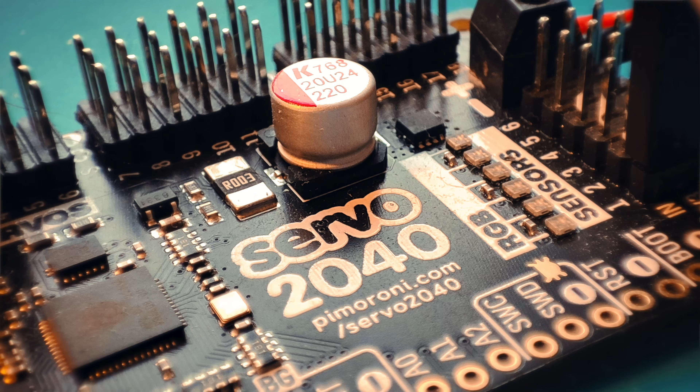Ever seen a spider robot in action? Well, in this series we are crafting our very own. Using materials that are easy to find, we are crafting a DIY spider robot. And I'm inviting you to join me on this adventure.

Now, a small confession. I'm learning as I go. Some challenges still puzzle me. And the beauty of this series is that we'll tackle them together, step by step. If you are new here, I suggest starting from the beginning to get a full experience. Throughout this series, I'll break down each part of the project, ensuring you can follow along with ease and maybe even kickstart your own robotic creation.

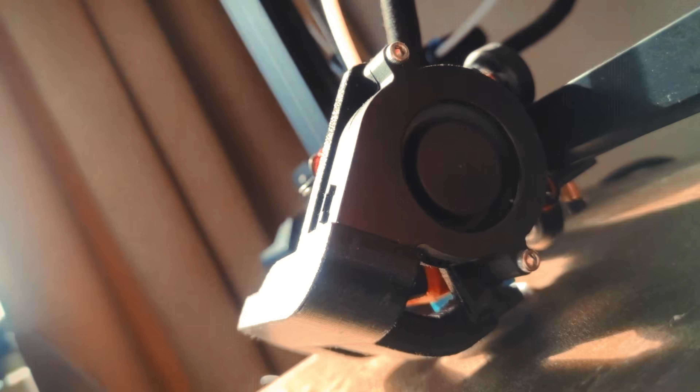I aim to keep these sessions short and to the point. However, if anything feels a bit rushed or unclear, don't worry, I've provided supplementary documentation and Jupyter notebooks to help reinforce and expand on what I cover. Remember, it's about the journey and understanding, not the pace.

Join me and let's embark on this exciting DIY voyage together. Today's enchanting adventure begins with exploring the secrets of inverse kinematics, where we'll learn how our spider robot will move its legs to traverse its surroundings gracefully.

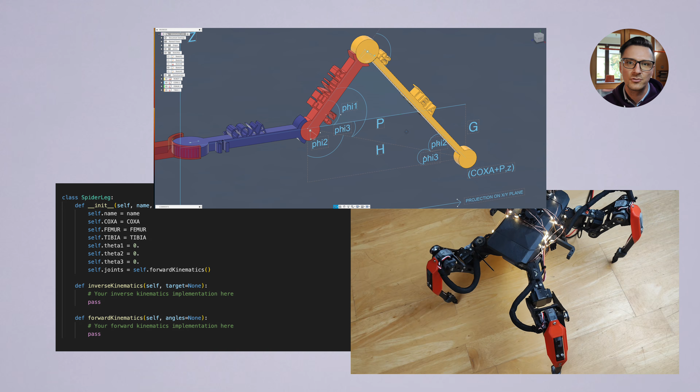In this tutorial, we'll learn how to write a SpiderLeg class to perform inverse kinematics calculations for a spider robot leg. Inverse kinematics is a method used in robotics to calculate the joint angles required to achieve a specific target position in the workspace. The opposite of inverse kinematics is forward kinematics, which calculates the position of the end effector, for example, the tip of a robot arm or leg, given the joint angles.

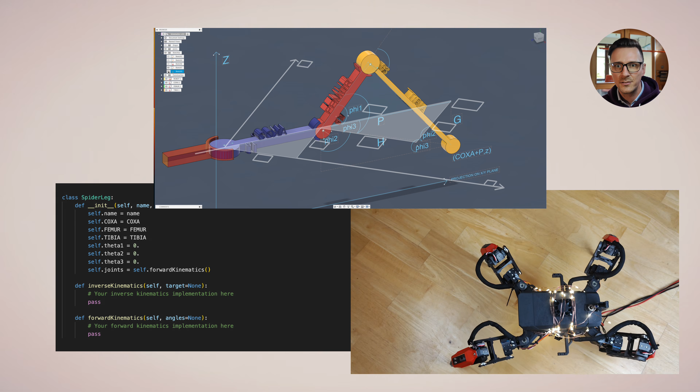In the case of our spider robot leg, we have three joints: the coxa (hip), femur (thigh), and tibia (shin). Each joint has an associated angle, which we'll call θ1, θ2, and θ3. Our goal is to determine the values of these angles that will place the leg's end effector, the foot, at a desired target position, x, y, z.

However, this is just scratching the surface of the spider leg's complex kinematics. For a more in-depth understanding and to see the intricate interplay of these angles and segments, I highly encourage you to visit my detailed tutorial on GitHub, where I break down the concepts further and provide a comprehensive guide to the sophisticated world of inverse kinematics.

In the example above, we have defined a simplified spider leg class that represents a single leg of a spider robot. The class includes the following elements. The init method initializes the class with a name, segment lengths, coxa, femur, and tibia, and initial joint angles, θ1, θ2, and θ3. The forward kinematics method is called to calculate the initial joint positions.

The inverse kinematics method is a placeholder for the actual implementation of inverse kinematics calculations. When given a target position, this method should compute the joint angles θ1, θ2, and θ3 required to reach the target. The forward kinematics method is a placeholder for the actual implementation of forward kinematics calculations. When given a set of joint angles, θ1, θ2, and θ3, this method should calculate the resulting end effector, foot, position in the 3D space.

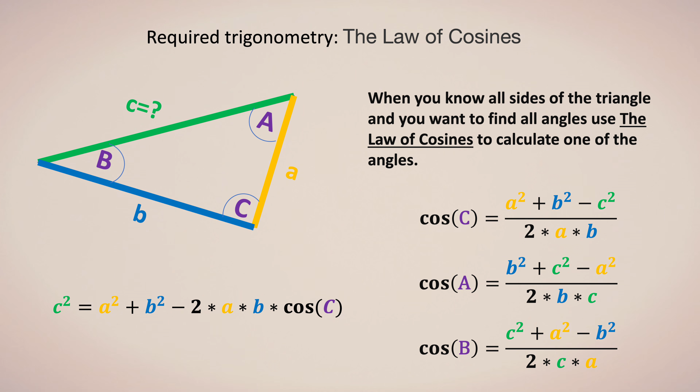Next, let's revisit fundamental trigonometric functions. Sine, cosine, and tangent are crucial for understanding the angles and sides of right-angled triangles. We also dissect the cosine rule, a pivotal principle that extends beyond right-angled triangles, helping us determine unknown sides and angles. These concepts are not just theoretical, they're the building blocks for calculating precise movements of our spider leg model.

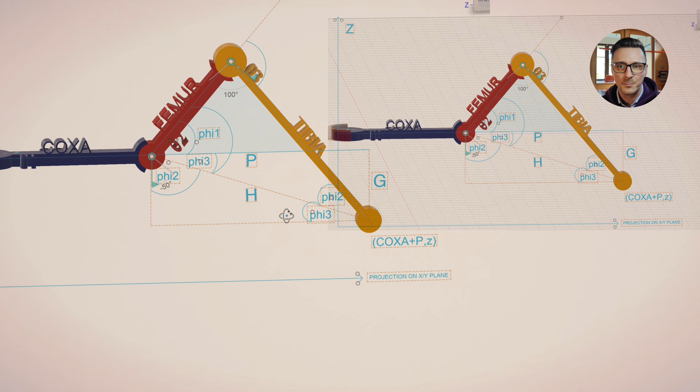While these explanations provide a snapshot of the mathematical intricacies involved, I invite you to join me on GitHub again for a comprehensive breakdown. There, I unpack these concepts further, ensuring you have a robust foundation to tackle the complexities of inverse kinematics. I apologize for the lengthy introduction, but it's essential for understanding what's to come. Now let's move on to the actual calculation process and dive into the practical side of inverse kinematics. Thank you for your patience.

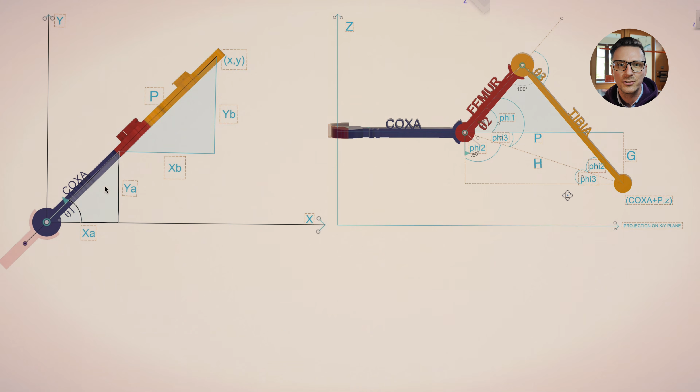Let's get started. Now let's begin the process by calculating the first angle, θ1, which determines the leg's horizontal orientation. To do this, we can imagine a right-angled triangle formed by the x and y axis and the coxa extension. We need to find the angle between the x-axis and the coxa, which we can call θ1.

To determine the actual angle, θ1, we use the arctangent function, often abbreviated as atan. This mathematical tool calculates the angle when you know the ratio of the opposite side's length to the adjacent side's length in a right-angled triangle. Essentially, it helps us figure out the steepness or incline angle based on the triangle's dimensions.

So, in our right-angled triangle with legs x and y, atan(y/x) gives the angle θ1 between the x-axis and the coxa. This calculation gives us the horizontal orientation of the leg, which is an essential first step in determining the joint angles for inverse kinematics.

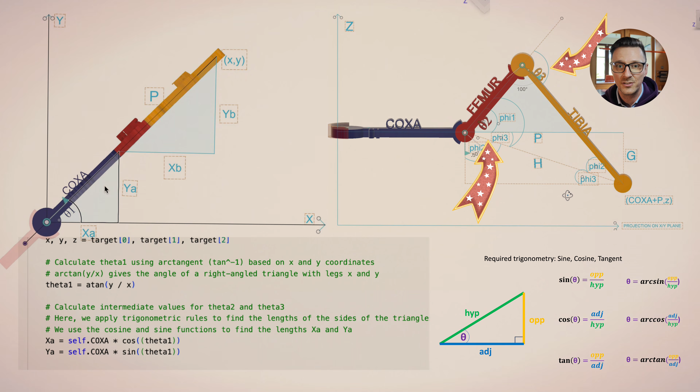Next, we'll calculate intermediate values needed for determining theta 2 and theta 3. We'll use the sine and cosine functions to find the lengths xa and ya, which are the projections of the coxa segment along the x and y axes. Now we'll find xb and yb, which are the remaining distances along the x and y axis from the coxa segment to the target position.

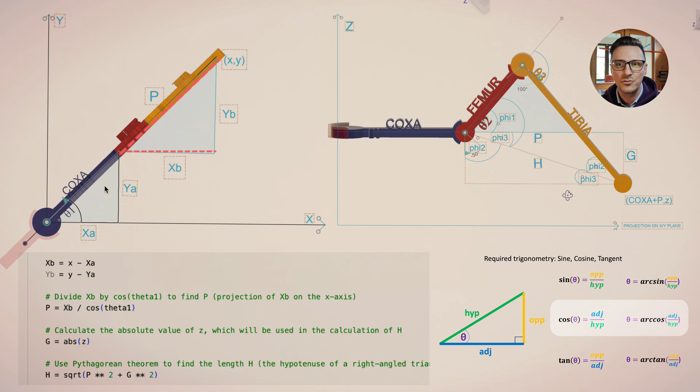To find p, we can use the following relationship based on the cosine function for a right-angled triangle. In our case, the adjacent side is xb, and the hypotenuse is p. Rearranging the equation, we get this, which we translate to Python code that calculates the hypotenuse p, which is the horizontal distance from the end of the coxa to the target point in the horizontal plane.

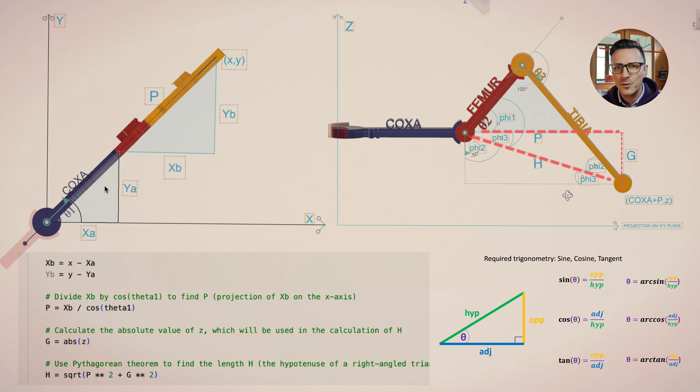G is the absolute value of the z coordinate of the target position. It represents the vertical distance between the coxa-femur joint and the target position along the z-axis. We can imagine a right-angled triangle with P as the base, adjacent side, G as the height, opposite side, and H as the hypotenuse. In this triangle, the angle between the base, P, and the height, G, is a right angle, 90 degrees.

The Pythagorean theorem states that in a right-angled triangle, the square of the length of the hypotenuse, the side opposite the right angle, is equal to the sum of the squares of the lengths of the other two sides. To find the length of h, we can take the square root of both sides of the equation.

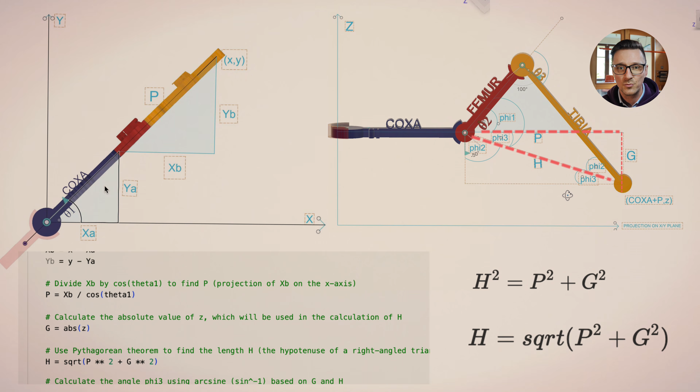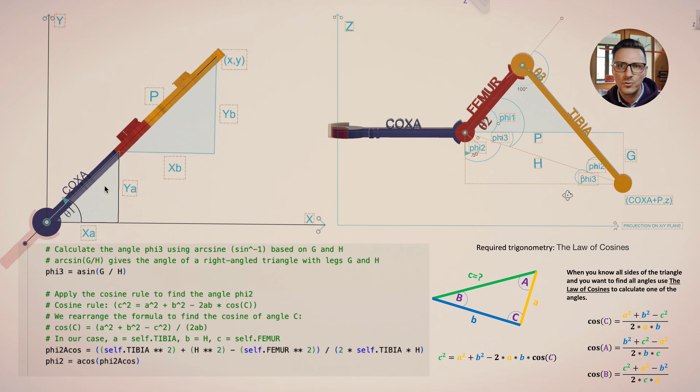Next, we'll use the arcsine asin function, which is the inverse of the sine function, to find the angle phi 3. In a right-angled triangle with legs g and h, the arcsine g over h gives the angle between the side opposite the angle and the hypotenuse. Now, we'll apply the cosine rule to find the angles phi 1 and phi 2. The cosine rule is a formula that relates the lengths of the sides of a triangle to the cosine of one of its angles. We'll rearrange the formula to find the cosine of angle C.

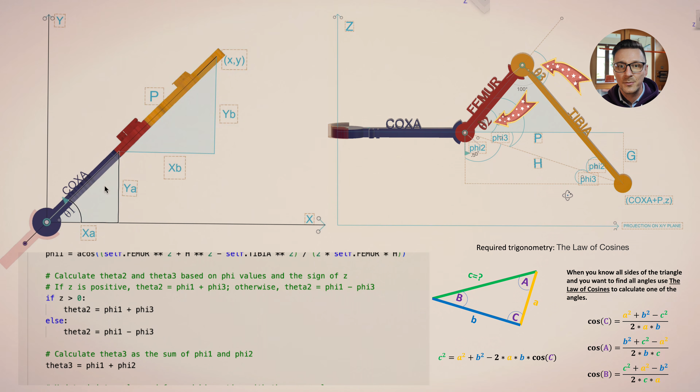With the phi 1, phi 2, and phi 3 values calculated, we can now determine theta 2 and theta 3 based on these values and the sign of z. When the leg is lifted above the coxa, z is larger than 0. In this case, the target position is above the coxa-femur joint along the z-axis. To reach this position, the leg needs to bend backward. To calculate the correct value of theta 2, we need to consider both phi 1 and phi 3.

We add them together. When the leg is lowered below the coxa, z is less than 0. In this case, the target position is below the coxa-femur joint along the z-axis. To calculate the correct value of theta 2, we need to consider the effect of phi 3. Finally, we'll calculate theta 3 as the sum of phi 1 and phi 2. With the angles theta 1, theta 2, and theta 3 calculated, we can update the joint angles.

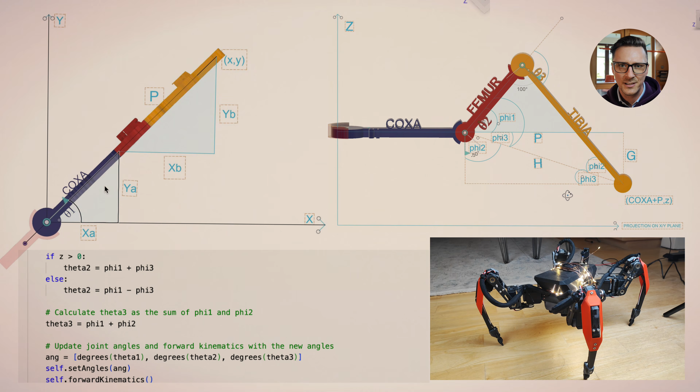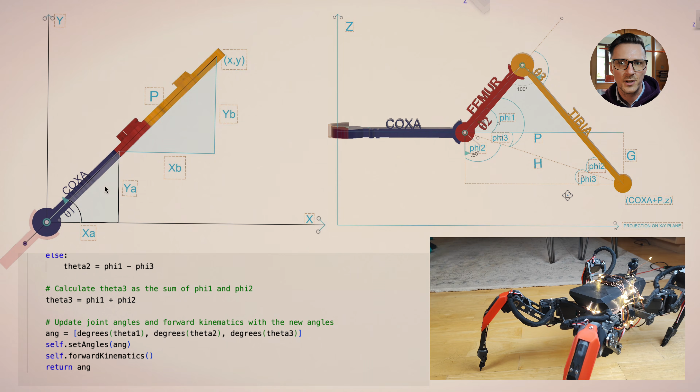To summarize, we've used trigonometric functions such as sine, cosine, and tangent, as well as the cosine rule, to calculate the joint angles required for our SpiderLeg model to reach a specific target position. By understanding the relationships between the lengths and angles in right-angled triangles, we've been able to apply these principles to a more complex three-dimensional problem.

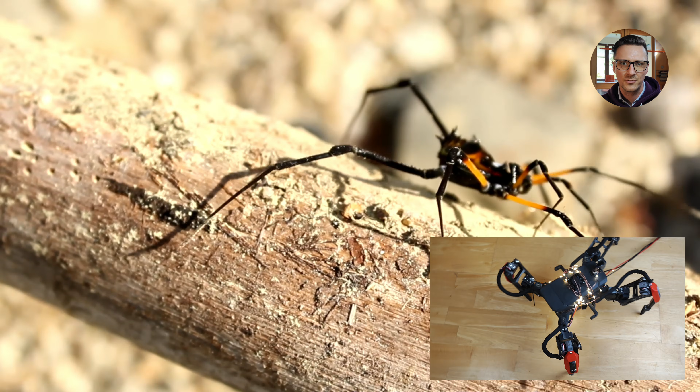It's important to note that the actual structure and movement of a spider leg in nature are far more complex than our simplified representation. In this tutorial, we are using a basic mechanical model with 3 segments and 3 joint angles to help us understand the fundamental concepts of leg movement and inverse kinematics. Keep in mind that real spider legs have more intricate joint structures, muscle systems, and movement patterns, and our model serves as an approximation for educational purposes.

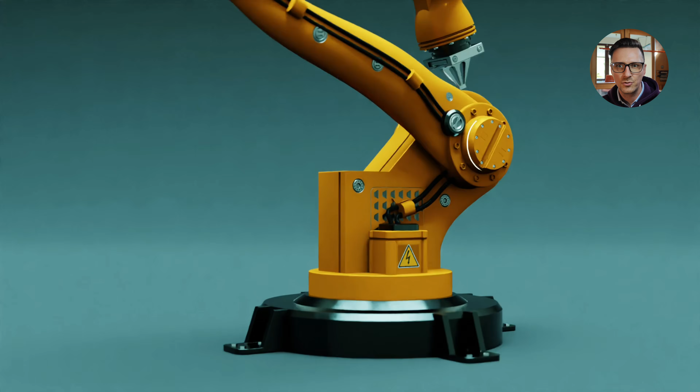Please also note that the approach presented in this tutorial is a simplified, you could say naive method for solving inverse kinematics. In robotics and more advanced applications, there are more sophisticated methods used for inverse and forward kinematics, such as the Denavit-Hartenberg method, the Jacobian method, or the cyclic coordinate descent method. These methods offer more accurate and efficient ways to solve inverse kinematics, especially for more complex robotic systems. However, for the purpose of this tutorial and for a better understanding of the basic concepts, I have chosen a simplified approach.

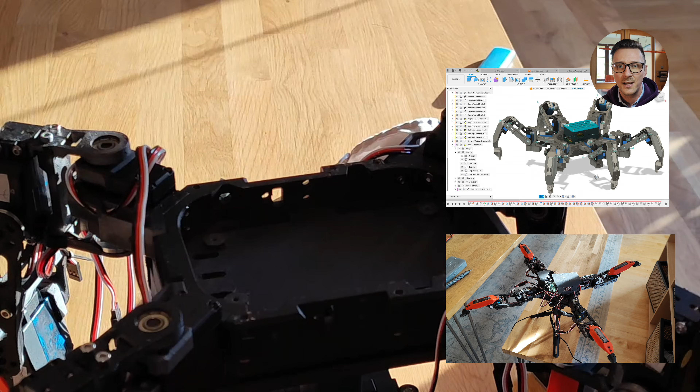And there you have it. I really enjoyed creating this video for you, and I hope it has helped you understand the workings of a simplified SpiderLeg model and the trigonometry behind it.